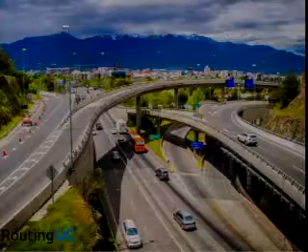I'm going to start showing a little bit about Santiago so that you get an idea of the city. That's the city in winter. We are now in the middle of the summer, so it's funny for me to be here in this type of weather. So a few pictures of Santiago. And this is our campus. It has 3 buildings by Alejandro Aravena, who won the Pritzker Prize, the most prestigious prize in architecture, last year. A few pictures, and that's the mountains. We have Los Andes and ski resorts an hour drive away in July, August, which is our winter time, if you want to go.

So what I'm going to present today is divided in roughly 5 parts. First, I'm going to talk about the problem of bunching of buses. For those of you who have never taken a bus, probably you don't know the problem, but if you have taken buses in your life, you have experienced this. Then I'm going to talk about the research we did, what the ideas were, how we got to publish things, and why we decided, based on these simulation results, to try to implement this in a company, and all the challenges that we have been facing to keep this going.

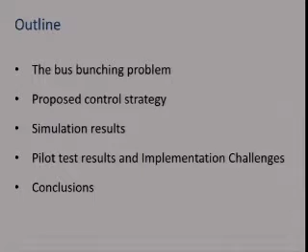Okay? So, some humor here. We know that buses are more efficient in using the space. When we started working on that, we did a workshop on BRT in 2008, and we took a picture right next to the presidential palace, thinking that if we did that, we would get on the first page of the newspaper. It wasn't like that. We managed to get the street, we managed to take the picture, but it was only in one newspaper, really in the middle of nowhere. But still, it's important to improve the level of service of public transport so that we can have a better use of our space.

So normally, what we know is that users perceive waiting time and walking time as twice as important as travel time inside the vehicle. They don't want to transfer, especially if the transfer is uncomfortable. They need a reliable experience, and that's one of the problems with bunching. They request a minimum comfort experience, and that's a severe problem in cities like mine, in which buses are really overcrowded, and if you have bunching, you normally board the crowded bus and not the other ones. You need information, and you need to feel safe and secure.

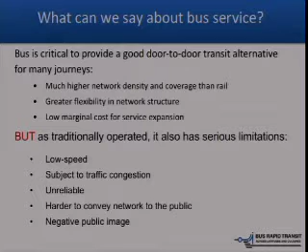So we wanted to bring to the buses what is good in a metro system. So what are the attributes of a metro system? Normally it's fast, you don't wait, or the waiting times are known, you have comfort and it's reliable. There are measures to increase speed, frequency and capacity, but one of the critical ones, and the one we are looking to solve here, is to improve regularity so that the buses arrive as often as they should. To do that, we need to improve headway regularity, and that's the focus of this talk.

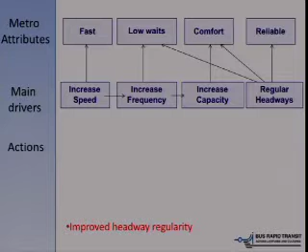I'm going to show a small academic example of why bus bunching happens. If we have two bus stops and two buses, we would like the buses to always be on opposite sides of the diameter. So they are at the same distance, and they pass every 5 minutes, every 10 minutes. Depending on how many buses, we would like them to go at the same interval. But there is a lot of stochasticity in our system. Which? The demand at the bus stops and the travel time between bus stops. With these two things, it's very difficult for the buses to maintain the desired headway.

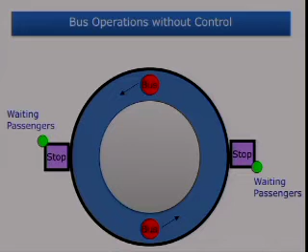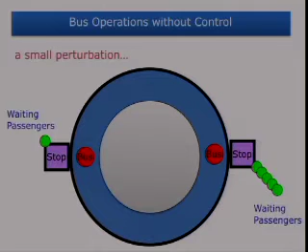So what happens? For instance, a lot of people come out of a seminar, and you all go and take the bus or the tram. What happens with that tram? It will have a longer stop at the bus stop, and the vehicle coming behind will have a shorter headway. If you have a short headway with the previous vehicle, not many passengers accumulate at the stop, so all the following stops are going to be short. And if you are delayed from the desired headway, you start picking up a lot of passengers at the following stops.

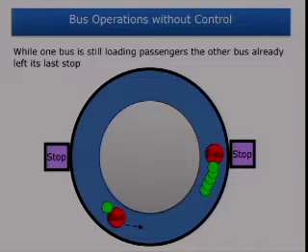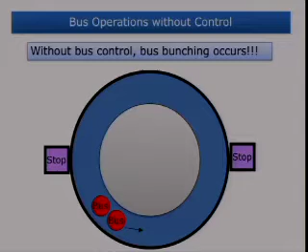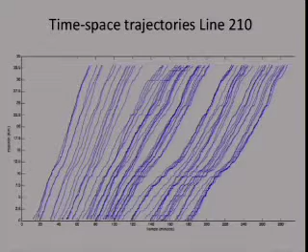And here, in this service in which you should have a bus every 3 to 4 minutes, you might wait more than 40 minutes. So this is a severe problem. Most passengers wait longer than they should for crowded buses. They put pressure on the authority for more buses, and that's another problem because when people complain that there are not enough buses, they will not complain that we lack something to have a more regular service.

Normally, at least in our country, there are private operators. So the private operator doesn't really have an incentive to solve the problem, because if people complain that they want more buses, probably in their contract they're going to ask for more buses per hour, and so they're not looking to solve the problem. It will reduce the reliability, affecting passengers and operators.

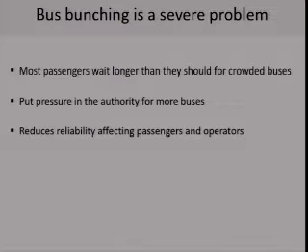In terms of the operator, the cycle time of the bus is unreliable. You don't know if the bus is going to arrive, because there are some buses that run very fast and others that go very slow. So sometimes you're not going to have the buses to send to a new service or to the same service in the opposite direction, and you might need more buses to operate. And for passengers, it's a very unreliable system.

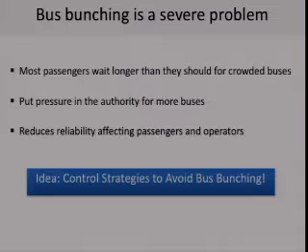So the idea is to provide control strategies to avoid bus bunching. Of course, the idea is not new and had been tried, but not that many companies operate successful strategies to avoid bus bunching. So what are the two main ideas to solve bus bunching? One is to have schedules, and you tell people at what time you are going to stop at each bus stop.

And normally when I tell people that I'm working on this problem, they always come back with someone who had visited a small city in Europe, and they told me, oh, the buses ran on time, and they arrive at the hour that they're supposed to be at the bus stop. But they don't realize that if you're going to pass a bus every 40 minutes or every 30 minutes, it makes a lot of sense to tell someone at what time this bus is going to stop at each place, and probably you build some slack so that the bus could arrive on time to the different stops.

But if you're going to run buses every 3 to 4 minutes, it doesn't make much sense to provide the time of day that the bus is going to stop, because the error in my watch and yours is going to affect it, and you are not going to look into that. So you're just going to go to the bus stop to board the first bus that arrives.

And if you want to build the slacks in a big city so that the buses arrive on time, you will have the buses going very slowly so that they can keep on track. So this idea, which might be very good if you have night services, in big cities doesn't make much sense if you're going to have high-frequency services.

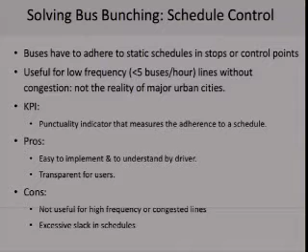So what we're proposing to do is to control the headway, to have regular headways. I don't care at what time the bus is supposed to pass at a particular stop. If all buses are delayed 10 minutes, we don't have a problem because they are passing at regular headways. And that's the main idea here.

So there are some strategies suggested in the literature. I'm going to mention some of them. But the challenge in practice is to make the smart solution robust enough to put it in practice. The other big challenge, and this is one that we are facing right now, is driver compliance. Maybe if we look at 20 years from now, when we have autonomous vehicles, that will not be a problem. But for now, and for the next 20 years, driver compliance is a big issue.

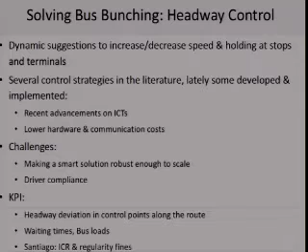And what are the measures that you would like to look at to see if the measure is effective? Maybe headway deviation at control points. You would look at some points along the route and see how regular the headways were, waiting times, bus loads. And in the case of Santiago, and that was one of the reasons that gave us the chance to prove our ideas on the street, there are fines to the operators for lack of regularity. So there's an index of regularity compliance, and if you measure this index, at the end of the month each operator pays a fine based on how irregular their services are.

So there was a pioneer paper by Turnquist and Blume that looked at threshold policies. So if you want to run buses every 5 minutes, whenever a bus is below 3 minutes from the previous one, you hold it until 4, for instance. And you can fine-tune how much you will use that threshold, but that was the main idea. And when we started the research, we thought that was a clever idea, and that probably should be our benchmark against which we wanted to compare.

And there were other papers in the literature. I'm not going to go into the details, but in most of the cases, they ignored the vehicle capacity, which was a very important issue for our problem in Latin America. We normally have crowded buses. The system is designed so that they have high occupancy, and sometimes you cannot board the first bus. And so we wanted to have that in our model; that was considered only in two.

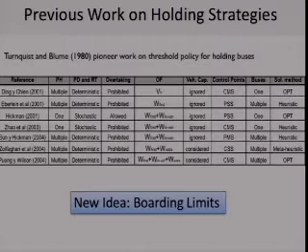And we came up with a new idea, because it was easier to model this way, which is to have a boarding limit. Maybe if a bus is ahead of schedule or is delayed already and it's getting crowded, you prevent everyone that is waiting for that bus from boarding that one and ask people to wait for the next one. It's not a very popular idea, and I'm going to show in which cases this makes sense. So the idea is to have two decision variables: how much to hold the bus and how many people to let board.

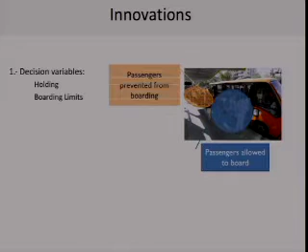So, for instance, and this is common in Chile, actually, in a crowded bus stop there normally is going to be a line to board the bus. So in that sense, it could be implemented in a fair way, to say, well, board these few passengers and the next ones wait for the next bus. And we have some passengers prevented from boarding. And the idea is to use that before the bus gets really crowded and full, because when you have a full bus followed by another full bus, then the headway between the two available buses for people at a bus stop is very long.

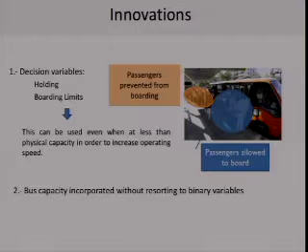For those of you who have studied mathematical programming models, the great part of this research was that we didn't use binary variables to model the problem, and that allowed us to solve this problem in less than 1 second, which makes it feasible to implement for real-time instances. Otherwise, there is some research in the literature that solves very complex problems. You can do it in the lab, but then in practice you are not going to have enough time to solve these real-time instances.

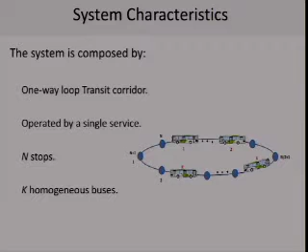So what were the system characteristics that we considered for the simulation? We have a corridor with n bus stops and k buses operated in a loop. So for research purposes, we consider the buses running in a continuous loop, with homogeneous buses, and we change maybe demand parameters. We have data about bus position, bus load, and number of passengers waiting at each stop, which in research you can do. In practice, you normally need to work with forecasts and estimations.

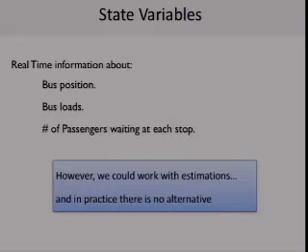And in practice, that hasn't shown to be a big problem. Some information about trip destination is good, because then you can predict better how crowded the bus is going to be. In terms of dwell times at bus stops, we consider that the boardings were the dominating factor of how much time a bus was stopping at each bus stop. And we assume that buses serve all stops and overtaking is not allowed.

And in practice, we also studied at some point when it would make sense for buses on the same line to overtake. And we found that if we control headway regularity, it doesn't make much sense that buses on the same line will overtake. Because once two buses get together, it's very hard to separate them, and overtaking will not solve the problem.

So what we're doing is that every time a bus arrives to a bus stop, we solve an optimization problem. So this bus arrived to a bus stop, we see where the buses are, and we solve an optimization problem to try to minimize the waiting times of all passengers in the system, with two decision variables: how much time I'm going to hold all the buses for the remaining bus stops until the end, and how many passengers I'm going to prevent to board until the end.

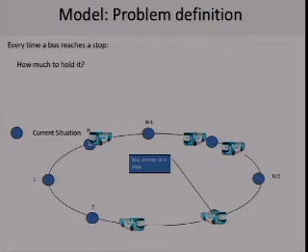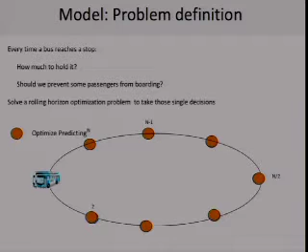So there were decision variables, and I solve it every time, and in simulation you can do, every time a bus arrives to a bus stop, you solve it. And you continue. So we solve a big problem to take only few decisions, and then we roll it again and solve again.

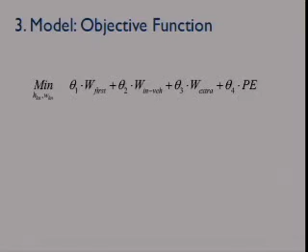The literature suggests that waiting at the bus stop is normally penalized twice as much as waiting inside the vehicle. So you could have a value double this. Then we have a waiting time: if you do not board the first bus, then all the waiting time until the next bus, or whatever bus you board, could be penalized at a different rate. And we have a penalty here if we don't allow boarding a bus when there is enough space. So with that, and putting in all the constraints so that the system worked, we ran simulations.

In the simulations, we have a one-way loop transit corridor with 30 stops and 29 traffic lights in both ways. High passenger demand. We were considering a headway of 2 minutes. This is a very high frequency service, 30 buses per hour. We also consider competing flow because in these simulations and the results, and I'm not going to go into the details, we also consider transit signal priority.

So if a bus is going to pass a traffic light and the bus is delayed, probably we would like to extend the green light so that this bus goes faster. If a bus is going ahead of schedule, sometimes we don't want to provide extra green time so that we can delay the bus without anyone complaining inside the bus, which is another problem normally when you implement these things. So cycle times, here are some of the parameters of the simulation.

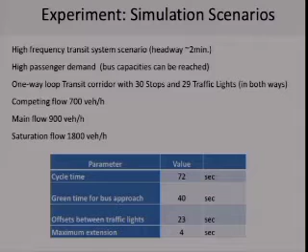And I'm going to focus only on two strategies. One is no control. No control, which is normally better than most systems, because here, in simulation, we were considering that the dispatch at the terminal was regular. And as I mentioned, you cannot dispatch regularly at the terminal if you're not doing anything with headway regularity along the way. So in no control, we dispatch regularly from the terminal every 2 minutes, and we let the system go without any intervention.

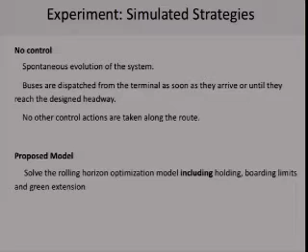And in the proposed model, we included holding, boarding limits, and green extensions. So the three strategies, but the most interesting one at the end turned out to be holding. So I'm getting ahead of our results.

Well, we did simulations, and we ran many times per 2 hours. And to do the comparisons, we did a warm-up in which we didn't control for 15 minutes, and then we started doing control in the experiments.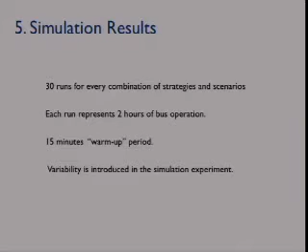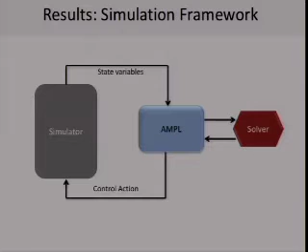And so how this worked: the optimization model was written in AMPL. We send it to a solver. We have a simulator from which we read the state variables every time a bus arrives at a bus stop. We solve the problem, and we took the control action, and that was simulated. And then I'm going to show you here.

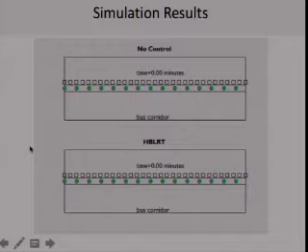So, oh wait, now it doesn't allow me, no? Don't know if because I changed the resolution, it doesn't work. Okay, I'm not going to get.

Well, let me show you some results. So, waiting time for the first bus can be reduced by 81% if we consider the variable part of waiting time. So there's a fixed part of waiting time. If you have 30 buses per hour and you have perfectly regular services, the buses will stop every 2 minutes. So on average, anyone arriving to the bus stop should wait at least 1 minute.

On top of that, everything else is what we can reduce, and we were able to reduce from the no control strategy 81%. There's a reduction on extra waiting time of 83%. Of course, there's an increment on waiting in vehicle, and there's a reduction on waiting from green extensions. So in total, we reduced the variable waiting time by roughly 61%.

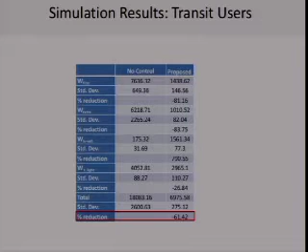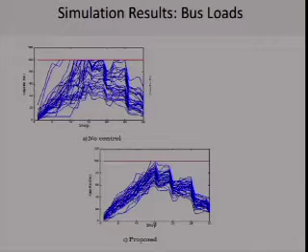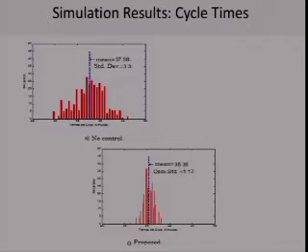And the explanation for this is that when you do control, you normally delay buses that in other cases are going to go very fast, and that prevents buses that are normally ahead of the pack in the bunching from going very slow, which are these ones here. These normally are buses that took very long to do the cycle and were very crowded.

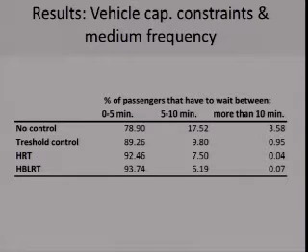So you might think that 1% is not that relevant, but in Santiago, in my city, there are every day 4 million trips in buses, 4 million legs of trips. So 1% of 4 million, you have a full stadium of people complaining that they had waited more than they should. And if you add that for a complete week, you have a lot of people unsatisfied with their transit system. So we thought that we had merit, at least from our results, to try and do it in practice. So this is a summary of what we had concluded so far.

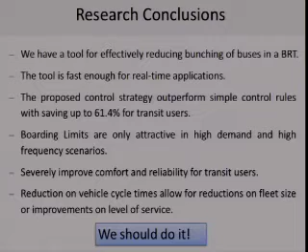And since I'm running a little late, I'm going to jump to this conclusion. We should do it. And we started and we did a pilot project. And we did the pilot project with the same line that I mentioned before, which is the line 210, which runs right in front of the university. And in Santiago, for irregularity, bus companies pay every month roughly $2.3 million. And there are 7 companies operating in the system.

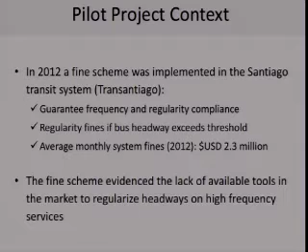So we thought probably we were not going to go down to 0, but if we can decrease it in a significant way... each company a month is paying roughly $300,000. So a year, this is $3 million. If we can reduce 1/3, that's a good value proposition for them. And of course, we are in academia, so we don't know that much about selling things to companies, and it has taken way longer than we thought. But anyway, it's been very fun.

We approached them. We had to make some arrangements to our model. I'm going to skip that. So instead of solving every time a bus arrived to a bus stop, we are solving every 1 minute, but some implementation issues. And we did a pilot test with the service 210 in November 2012 and then in April 2013. Since we didn't have any communication capabilities, we operated with the GPS of the buses. We were reading where they were. We had data about the demand on this corridor.

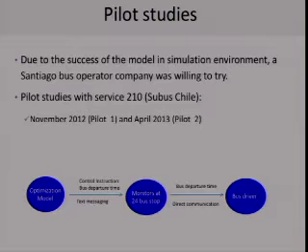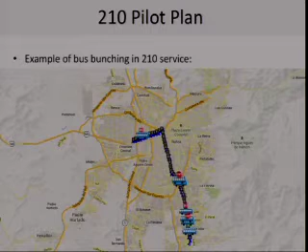And we were solving our problem and sending instructions to students on the way. This is the line. So this is a very complicated line. If I had to do it again, probably I would have chosen a simpler line, because doing a pilot with one of the most complex services in the city maybe was not the best idea, but that's the way we did it. Here I'm showing a real case of bunching where we have a few buses here, a few others here, and others at the end. And I'm going to show here the picture.

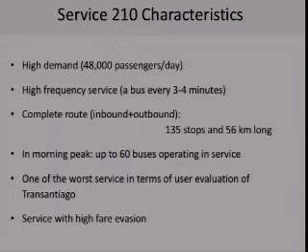We have students here with cell phones. These are 6 or 7-year-old cell phones that were bigger than now. And we sent them instructions in text messages with the solution of how much to hold the buses. And so they were taking note here, and they gave instructions to the driver. Some data about the corridor: it has roughly 50,000 passengers per day. Buses run every 3 to 4 minutes during rush hour. It's a very long route, 56 kilometers and 135 stops. And in rush hour, they have 60 buses operating the service.

And what did the pilot studies show us? These were the fines. These are in Chilean pesos. $1 is roughly 670 Chilean pesos. These are control days without control, and here are the 2 days in which we did the pilot. And when we did the pilot, we reduced significantly the amount of fines that they were paying on that line. And we were not doing every bus stop. It was only 8 places in which we had students.

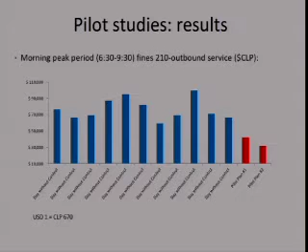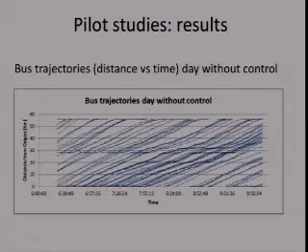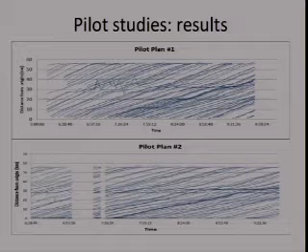It was an effort. These are the trajectories without control, and you can see that there are some problems with some of the data, which we have been improving a lot during the previous year, and the pilot plan, and you see some trajectories that shouldn't be there, and you still have some problems with bunching, but less than without the strategy. Other results that were surprising and very nice is that user validations increased. The demand increased by 20% during the pilot plan days.

And the explanation for that is that when the bus is very crowded, for many passengers it's very difficult to tap in with the fare card. So if we run it smoothly, on regular headways, everybody who arrives there could tap in, and so the fare evasion, which is a common problem in our system, was decreased severely. But we didn't see a significant effect on bus frequencies and cycle times.

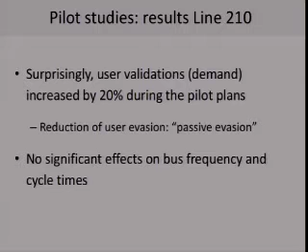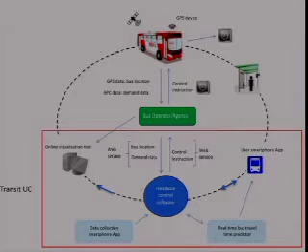With that, we created this group Transit UC. And what happens normally when you go and offer new things is that people tend to tell you that they're very busy. So it's part of the idea. But we developed all the technology to be able to communicate with drivers effectively. I'm not going to go into the details of that.

And so we did a new pilot. And since the company was happy with the first result, we went back to them. And one of the problems we had in this second one is that they already had a console. And the console was working with a schedule. So the driver for many years already had worked with a schedule that didn't work. And what we did was an API to communicate with that console and change the instructions on the console.

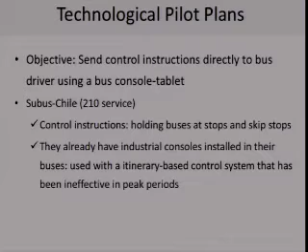But the drivers didn't believe the console. They already knew that the console was giving bad information. So that was one of the issues. This is the data, and this was the console that they had in the first place. The other thing is that the console had a lot of data that's not very useful for the driver. So a lot of information not required. And the only thing that was relevant is how he is going compared to the desired.

And what we did was to change the desired arrival time to the bus stop. So this bus is 1 minute ahead of the desired arrival time. And then we were giving instructions of when he should leave the bus stop. And normally they cannot implement it like that. So if you tell a driver he should leave in 20 seconds, what he does normally is drive slowly to the next bus stop. Otherwise, people will complain inside the bus.

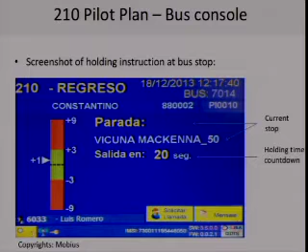Like here, it's another. And they were providing some, I don't know, please help the regularity. Follow the instructions. So the more I've been working on that, the less it makes sense to try to gain compliance with drivers if you treat them like that.

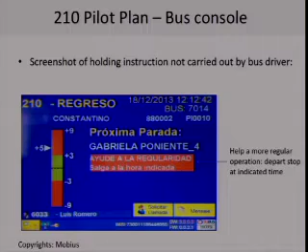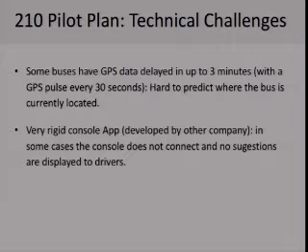So the other thing we had is that we had problems with the GPS data. Some buses didn't report in 3 minutes, so it was hard to predict where the bus was currently located. And we had to work with the app of another company who didn't see any benefit for them in giving better instructions. The other thing we see in practice is that some drivers like to bunch, because if you bunch, you don't carry that many passengers and you finish your shift earlier. So you have benefits of bunching.

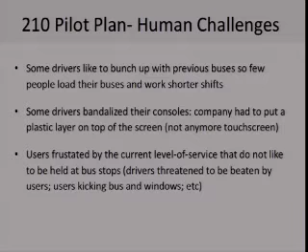Some other drivers vandalized the console, so we had to put a plastic layer on top of it and not a touch screen anymore. And the users were frustrated by the current level of service and do not like to be held at stops. So normally anyone who's inside the bus doesn't like to be held, because that benefits the ones that are going to board at the next stop, not them. Once you are in the bus, you want the bus going fast.

And for us, it was very difficult to work with this company because they still wanted the idea of a schedule. For some reason, we couldn't make them aware of the problem of having this schedule in place. So they wanted to go back to the schedule when the bus arrived at the next stop. The planning was not integrated with the execution, so they planned one way and executed a different way, but there was no feedback loop. And there were no incentives for drivers to comply. So if they don't gain any benefits, it's probably not fair.

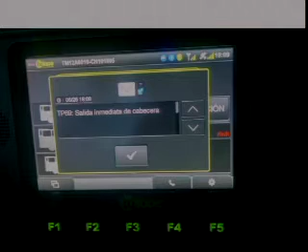So it was a text message with the driver. That was the console, and please go again. If you go to the math of this to analyze, the waiting time can be expressed as two parts. This is the frequency, this is half of the headway between two buses, plus this term that is related with the variance of the headways.

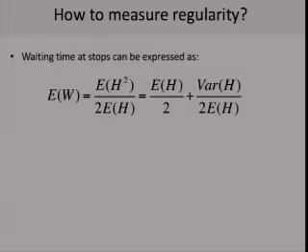In this part, you cannot do anything more than add more buses or increase the speed of the buses, but that's the part that we are working on. And I showed this because this is the fixed part and this is the variable part, and when you want to compare data on a real basis, this is normally not the same because some days they operate with less buses, some days the traffic is worse, so the cycle times of the buses are different. So I'm going to divide the total waiting time of passengers into the fixed part and the variable part. That's what I'm going to show in the next slides, okay?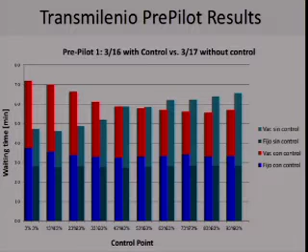And what you would expect if you don't do control is that the waiting time is going to be increasing, because the variable part is going to be increasing, but the fixed part should remain the same because that depends on how many buses per hour run and what's the cycle time. And when we compare, we notice that the cycle times and the number of buses operating in the day that we did the pilot was different, but we were able to do something very unusual. Since they were dispatching so irregularly, we can decrease a little bit along the route the waiting time. That shouldn't happen if you dispatch more regularly.

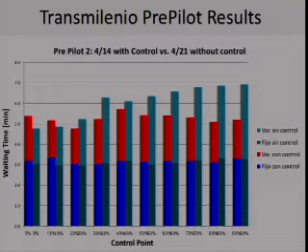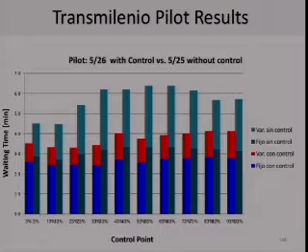On a second day, and these are more comparable days, we decrease, but on average, we sort of maintain the regularity or the waiting times along the route. Without control, you see how the waiting time increased. And this was the third day in which we did the trial, and we managed to keep waiting times along the route, whereas without control, they normally tend to increase. In terms of cycle time, there also we were able to decrease cycle times a little bit, and you see more variability without control.

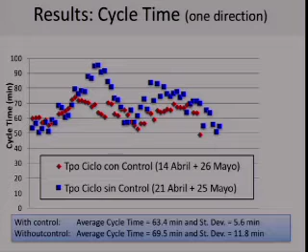So we had promising results, more regularity, less fines, and more demand. We still have the problems that not all drivers follow the instruction, and not all the vehicles have the consoles working. And sometimes companies don't realize that some consoles are not working until you go and do a trial and start sending information. They believe that they work because the information that is given is not so useful.

So this is our state of the art, the last part. We now have our own consoles installed in one service in Santiago. And we changed a little bit. We tell them what's the next stop. We tell him if he's ahead, behind, what's the bus behind and what's the bus in front. So he has a sense of where the bus in front is, where the bus behind is, what's the distance, what is the expected time between the two buses, so that when you give instruction, it makes sense to them. Otherwise, it's very difficult to believe that you're giving something useful. And we built a platform to support the console, and we are using industrial consoles to operate.

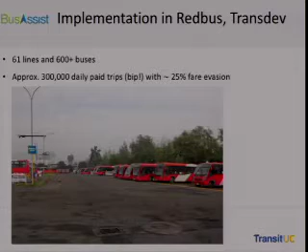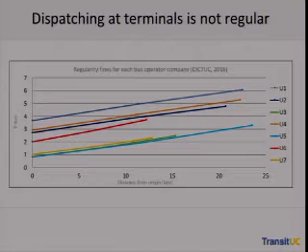But some of them have better dispatching rules than others. So what we have now, we have this console operating in 2 services in Santiago. We have a synoptic. We have a dispatcher that is operating in most of the services in Redbus, this company in Santiago, because we realized that before doing the work with drivers, we needed to dispatch more regular. And dispatching, if you don't have information of where the next bus is coming on the other way, and if you're going to have buses to dispatch, it's a real issue.

So we developed an app to do the dispatching, to give better instruction, and actually also to keep record of when the buses are being dispatched. Since we have all the data, we also developed an app for users. There are many apps for users in which we have real-time information of where the buses are. It's like an elevator. It's better to know where the elevator is than someone telling you how many minutes you need to wait. So in the same sense, if you're showing them where the bus is, that makes sense.

We can provide them with our forecast of how crowded that bus is, but we decided not to do it because it's less reliable information, and unless you're really comfortable giving that information, we would like to wait. We also do a lot of demand analysis for the companies. We show them how many passengers are at each bus stop. And with this type of analysis, we also do some forecasting about fare evasion per bus stop. We developed an app to collect data because since it's a tap-in system and not tap-out, sometimes you need to collect data on how many passengers are in each bus. And so we built this.

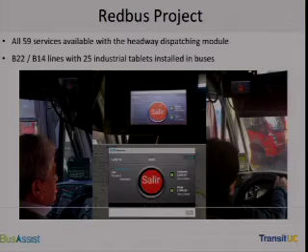So here are some of the apps. This is the... And I think this. Let me see if this works. So yeah, here it's working in a bus in Santiago. So it keeps the speed. Which is the next stop? Which is the bus ahead? Which is the bus behind?

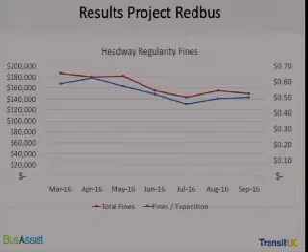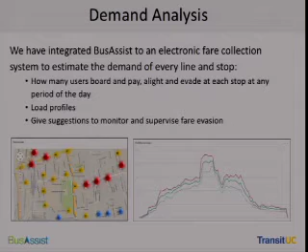This is the app, and these are the demand profiles for services, and these things allow the company to think, maybe if you have too much demand in this part of the corridor, maybe you can operate short services, so you can do some tactical operations here to provide better service as well.

So what are the challenges and opportunities, with which I want to finish? I think more companies are interested in this type of solution, so we look forward to working with them. How to improve the perception of drivers, that's a big issue. How to communicate with the driver. Is an image the best, or maybe voice, or a combination? What's the best way to interact with someone who's driving, who's doing many other things at the same time? How to present the information in the monitor, and maybe thinking about gamification to improve the compliance.

And in these things, we are thinking on how to give incentives to drivers, because you want each one to do it well, but you want the team also to do it well. So if you have something as a goal, as all the drivers that operate a line, how are they going to share the benefits of decreasing fines or improving level of service? That's part of that. And I'm open to questions, and I think I took too much time talking.